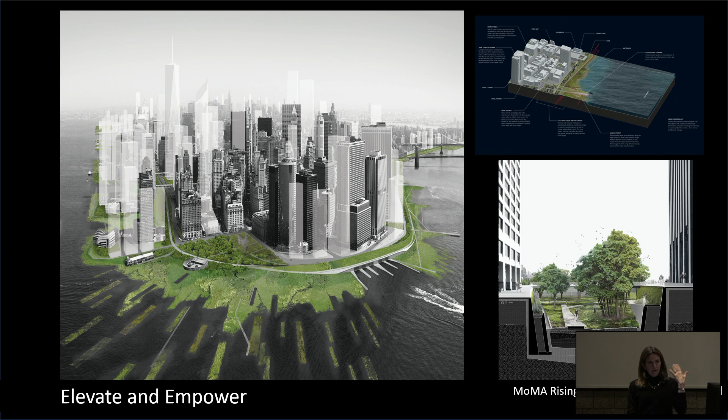So at the neighborhood scale, with the goal of making more resilient environments, we empower communities, in this case the Gowanus community of Brooklyn, with replicable strategies that could be deployed to reduce the pestilence of combined sewer overflows, control flooding and add needed open space. So the urgency of the community's voice was elevated to bring policy change, and some of the physical barriers were lowered to facilitate increased permeability.

So there's sort of two really emblematic projects for me that I like to start out with: the Sponge Park, and there'll be a book coming out about this over the summer, and then Rising Currents, which was about protecting, you know, a major metropolis.

But in terms of my work in general, I like to think of going from innovation to implementation, and when I started my practice, a lot of the work related to the adaptation of infrastructure systems. I was really entranced by post-industrial infrastructure when I was in graduate school, and I saw the potential for an invention of new kinds of systems that manage stormwater or make new public space or reconnect communities to break down some of the boundaries that were created by these infrastructure systems.

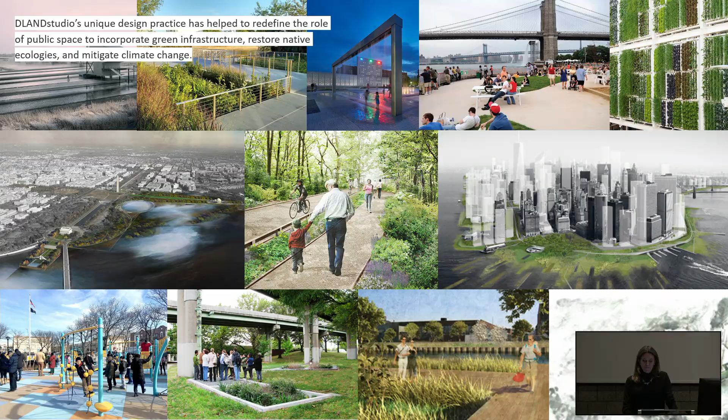So I started talking to Anna, of course, who's amazing, and I said, Anna, do you think Sasaki would want to have a New York office? And it turns out I was on a list already of firms that they were planning to talk to potentially purchase and have a New York office. So it all worked out in a really wonderful way. And we dated for a couple of years, and then we ended up merging. Because it's always good to date for a while before jumping into these things.

So Sasaki is this great platform. We have planners, we have ecologists, we have architects, we have civil engineers, we have landscape architects. One of the things I'm really excited about is we have this strategies group that develops this really cool specialized software, which is becoming increasingly useful in our practice.

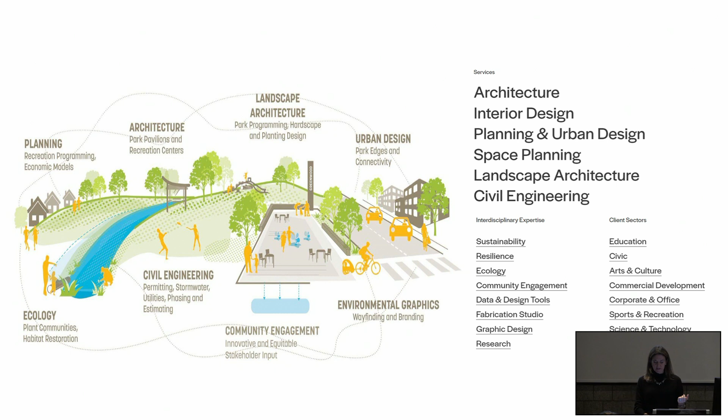Like tomorrow, I'm flying to Taliesin West because we're doing the master plan for Frank Lloyd Wright's Western Outpost. And I'm bringing my ecologist, my civil engineer, and my strategies person, and we're all going to be there figuring out the future of that really important historic campus.

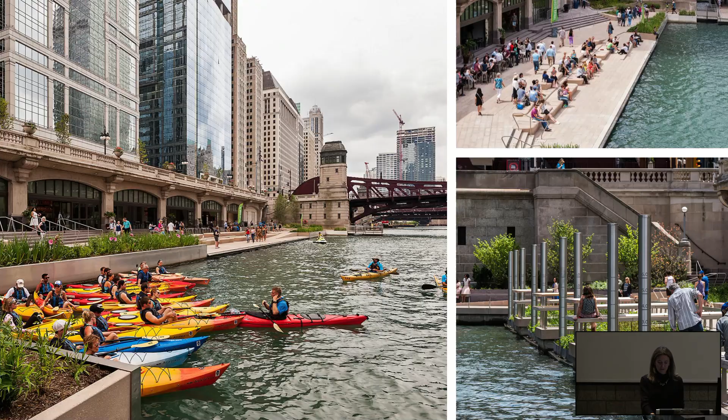And some of the things that we're doing are so exciting. Not only having the accessibility of these kayaks and bringing all the people down, but also these floating wetlands are these incredible mechanisms for cleaning the water that's coming out of a combined sewer overflow. So when I experienced this, I thought, okay, I've made the right decision. This is a great merger.

But back to the title of my talk: the Geophysical City, and you may be wondering what I mean by that. The next few slides will break it down. The Geophysical City recognizes that hydrologic and geologic systems have an imprint on urbanity that will re-emerge with climate change. And we can fight those forces of nature, but at what cost?

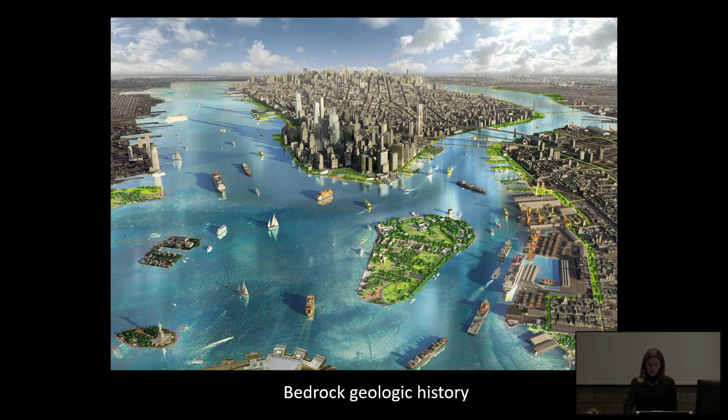Now with engineering, we fight against that a little bit more, but it was this really interesting phenomena that I think is important to consider. So in simple terms, if we look at the Earth, at the planet and its atmosphere, which created life, and its core, which made the topography, geomorphology is the shape of the land.

Earth science professor J. Taylor Perron from MIT suggests that in geology there are forces that roughen and forces that smooth. The roughening forces include movement of the tectonic plates of the lithosphere that float over a circulating mantle, and the interaction of the plates creates earthquakes and volcanic activities.

This is science that my dad worked on in the 50s. He helped to prove plate tectonics, so I grew up with this, it's embedded in my mind. My father fought in World War II, came back, got his PhD at Columbia, and they went out mapping the ocean floors. They didn't know, they hadn't proved plate tectonics yet. It seems so fundamental to our knowledge now that you have these geologic plates moving around, but it was only proven relatively recently.

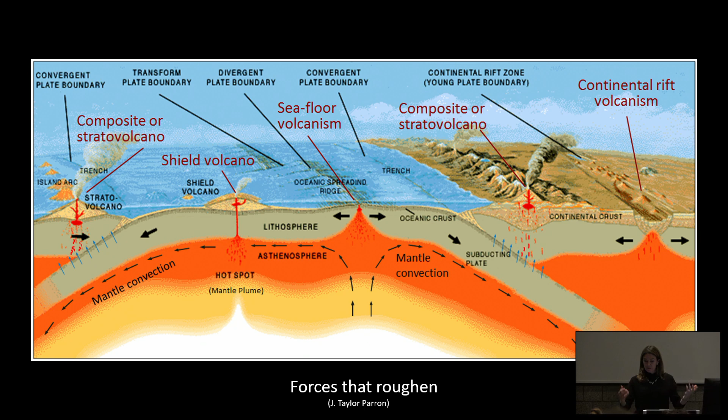What that means is that you had a huge amount of building happening without that knowledge. We can look back to Japan and say Japanese joinery is really good for building with earthquakes, but there's a lot of ignorance about building for this kind of tectonic activity, or denial. So then, the forces that smooth.

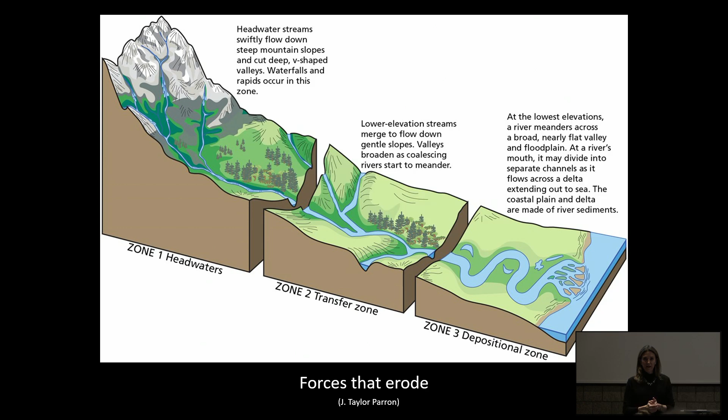Rivers and streams are among the forces that erode and smooth the landscape, and the speed of water and the material over which it passes creates different forms. I heard some wonderful discussions today about geologic activity. Clearly you're all aware of that, and it's starting to integrate your work, which is exciting, because in some places that isn't discussed as much.

Then patterns can also come from our need to come together, our need for collective activity, as we have today. And patterns can also come from policies of exclusion and segregation. So there are lots of different patterns in the landscape, some better actors than others.

Ecology is about the relationship of organisms to one another and to their environment. It's a set of relationships between complex systems and their surroundings. Ecology is not synonymous with environmentalism, which is about advocacy for the protection of natural resources.

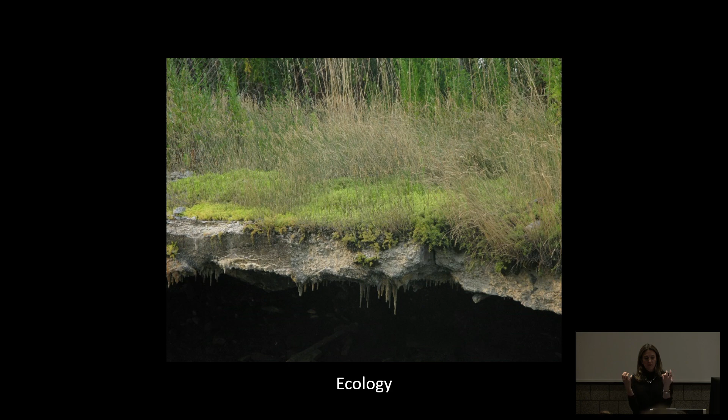A landscape left abandoned will go through iterations of succession with patterns shifting based on various microclimates. This is actually an image of the Gowanus Canal, where it's this incredibly dirty post-industrial canal, but meanwhile you have this emergent ecology coming together.

So I start to look at the connections between these things, between ecology and culture—current discourse of ecological urbanism and biomimicry, I would say, fall into this category. There's a lot of discussion about the potential for examining this intersection, and I think it's a fruitful discussion.

This is something I mentioned earlier in one of the classes, the work of ecological patterns in connection, as a connection between ecology and design. This is the work of Richard T.T. Forman, and it suggests three key steps to bring landscape design to public conscience: science, design, and a bold vision. You should all buy this book or read his writings, because he talks about the connection between the forms of different ecological systems and their ecological productivity, and it's powerful.

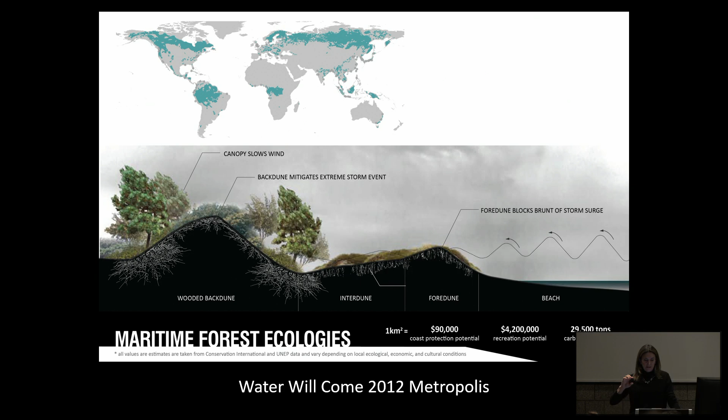It's a really powerful thing for us to understand that, say, patches of a landscape or of a landscape type aren't as valuable as a connected landscape. It's a really simple idea, but it's something that really empowers us as designers. And that can then start to connect into these huge larger scale thinking or projects dealing with the larger patterns of ecological systems across our planet.

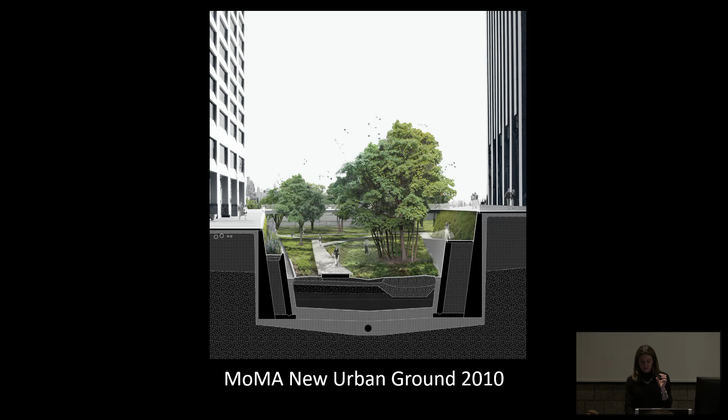So this was the MoMA Rising Currents project, and it was really looking at the combination of ecology and engineering and urbanity, and trying to realize some of these ideas. And then we have earth and culture. And again, this is Rising Currents, so examining these connections of things. And then looking at historical indigenous patterns to sort of consider how they related to the landscape, and now how we can push some of those ideas forward.

So the landscapes record the planet's past and offer clues about its future. So our research in geomorphology, the scientific study of landscapes, deciphers these records to discover how geology, climate, and life intertwine to shape the surface of the Earth and other planets and moons. We use fieldwork, mathematical and computational modeling, remote sensing, spacecraft data, and laboratory experiments. Most of our work falls into 3 areas: landscape evolution, planetary surfaces, and human landscape.

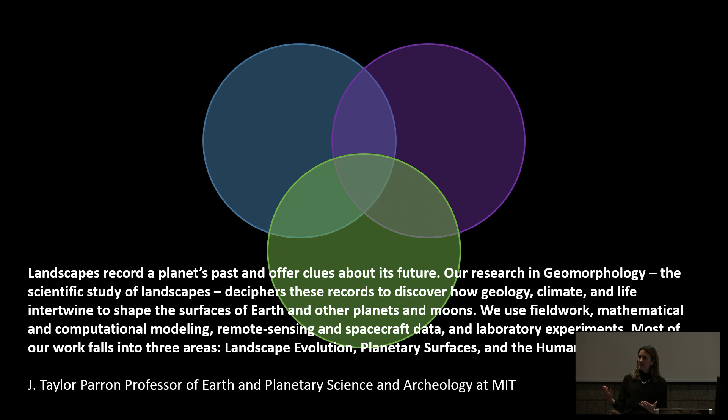This is a quote, this is not my writing, this is a quote from J. Taylor Perron, who is a scientist at MIT. And what I find fascinating is this could be written by a designer. This is thinking about spatial concepts, and that's why I think it's kind of fundamental. But

So the research is using planning and design to analyze and interpret the systems embedded in earth science, ecology, and anthropology; it explores typological and geographical case studies. And I'd say my project is to invent and explore theoretical expressions at the intersection of these things. So what I'll talk about now gets away from the abstract into more real case studies. So this is an important quote.

In theory, there's no difference between theory and practice, but in practice, there is. So the reality of transitioning from theoretical ideas to practical application is not always straightforward. And I learned the hard way through our Gowanus Canal Sponge Park project. So after complaining about a particularly challenging meeting at the Department of Environmental Protection, Kevin Clark, who was one of the project engineers at the New York City Department of Environmental Protection, said to me, in theory, there's no difference between theory and practice, but in practice, there is.

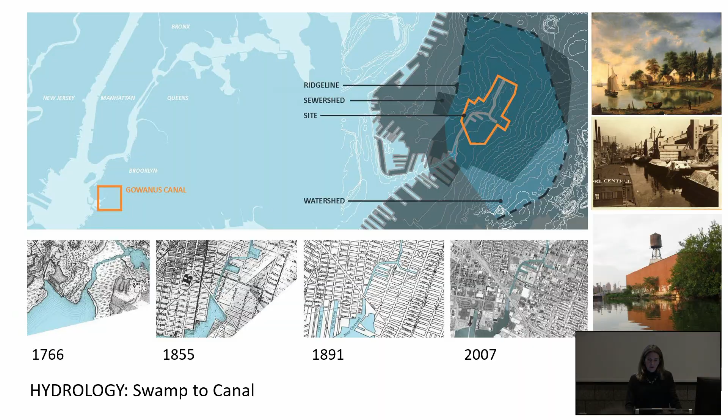It had undergone this incredible transformation from a wetland to an industrial area to a post-industrial area. And it's this low area in Brooklyn that's bordered by Brooklyn Heights, Cobble Hill, and Prospect Park. It's actually this incredibly beautiful, or was this incredibly beautiful post-industrial landscape, but it was really dirty.

So I gotta do a little shout out to Spencer Whitemore, who is a Ball State grad, who did these drawings for me because I needed these graphics for my book.

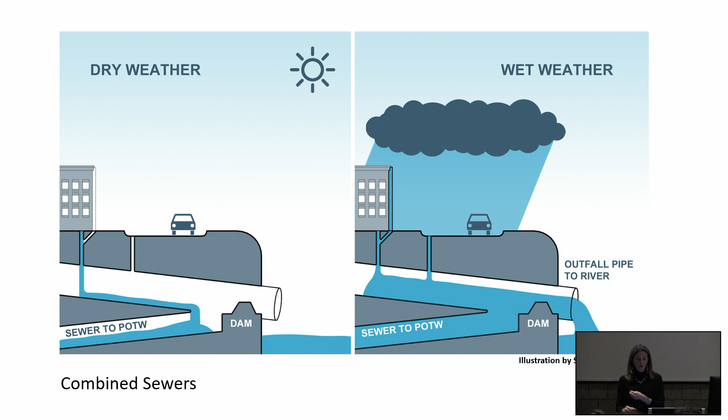Right. So anyway, this is the diagram of a combined sewer overflow. And back when I was doing this work back in 2008, this was a relatively untalked about concept that when you have sanitary sewage and rain combining in these combined sewer systems, the overflow goes into our waterways. And so the concept behind the sponge park was that you redirect the water that's falling on the surface of the ground and you channel that into these street end sponge parks.

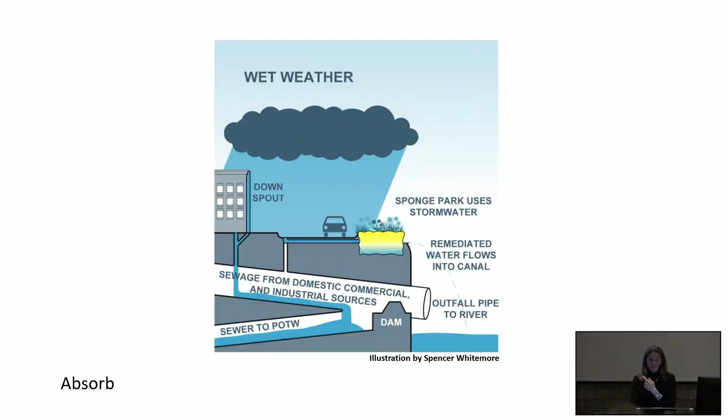And so he created this graphic too. I like how it looks like SpongeBob. It was particularly cute. But the issue here is that in Gowanus, it's an EPA Superfund site. It's really dirty, and you have all this water that's coming over dirty ground. It's collecting all the oil, it's collecting all the schmutz, all the garbage, and it's bringing it down to the street ends, and the water has nowhere to go.

And the other issue is that it's also going into the combined sewer areas, combined sewer outfalls in the upland areas. And if you look at the surface of the water there, that's actually poo. On the top of the water in the middle of New York City in the Gowanus. It's disgusting. And it's dangerous.

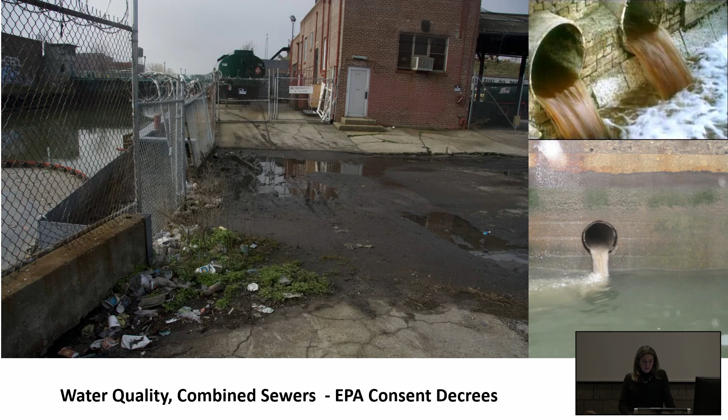And the reason that's important for me is that he also created the EPA, and the EPA has these consent decrees against cities that have combined sewer overflow systems to clean up their waters, right? So that all is putting pressure on New York City to clean up the Gowanus, and so that enabled my project.

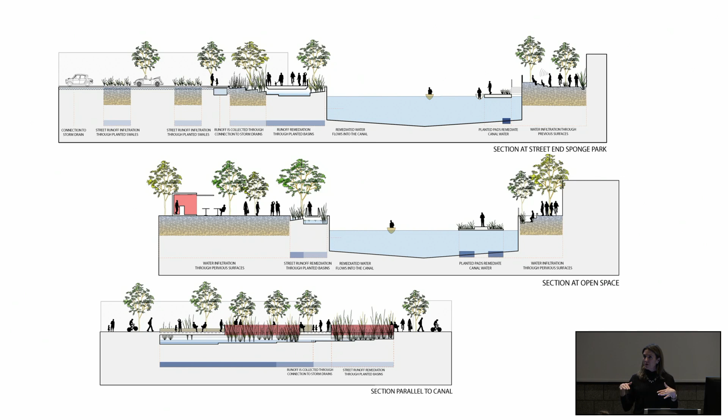So I'm dealing with a global issue, combined sewer overflows. It's not just in the United States, it's all over the world. And thinking about it through a local pilot project. The pilot started with a master plan and then moved into a smaller pilot project. So the idea behind the Gowanus Sponge Park was to make more absorbent landscapes in the area that surrounded the canal. It used to be a swamp, as you saw in one of those early images, but it's all been hardened, it's all paved, and so there's nowhere for the water to go.

So what we were trying to do is actually restore that historic hydrology and also make a public space, and also use plants that could start to phytoremediate some of the toxins in the soil and in the dirty water. So we want to use the power of these landscape systems to actually clean up the canal. And while we're doing that, also make a new cultural redevelopment area, because there are a lot of really cool old buildings in the Gowanus that could be repurposed.

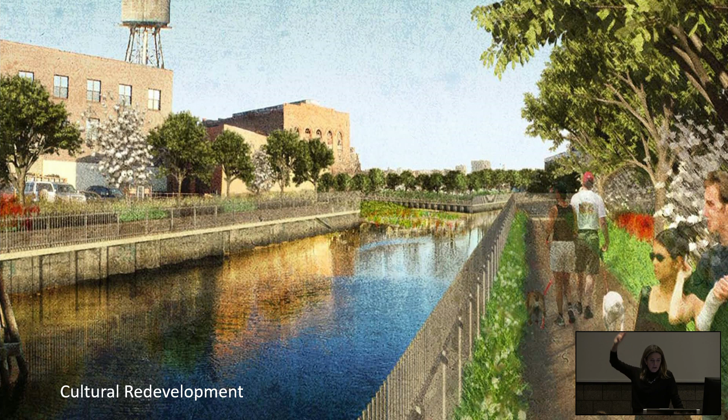And that was what we planned back in 2008. That really cool building off in the distance beyond the water tower has been turned into an art center now. So a lot of the things that happened within this master plan have come to fruition. So we worked with a really wonderful team to do this project, a team of engineers and soil scientists and people from Manhattan College who were doing monitoring.

So this is one of the most important drawings that I have ever created, and the reason it's important is that it outlines the jurisdictions that exist in the Gowanus, and it explains who owns what and who controls what part of that landscape. So, for instance, the soil underneath the canal is controlled by the EPA Superfund people. That's one entity. It's a navigable waterway, so the water is controlled by the Army Corps of Engineers. There was some question about the bulkheads being a historic element, which would have brought in the state preservation group called SHPO.

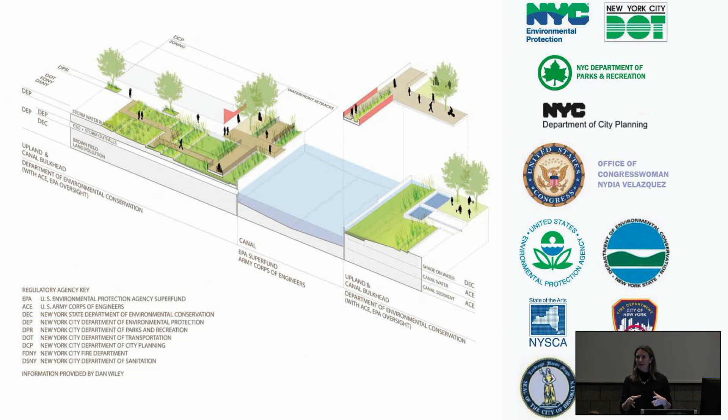so there are about 200 permits you have to get for any waterfront project, and that's not even in an EPA Superfund area. So it was really complicated, and the pilot is like this big. It's this tiny little project, but it was important because it was trying to move the needle on adding these permeable spaces, these green engineered spaces in New York City.

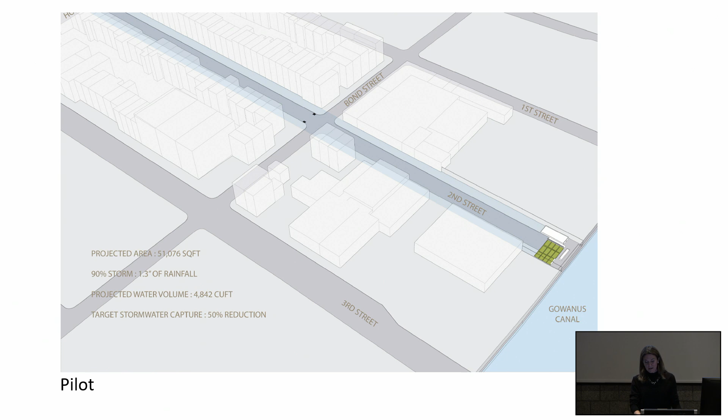So this is just an image of the catchment area showing that we had a projected area. All you landscape architects know that you can calculate the amount of water in that catchment area and then design your green infrastructure system to manage that water. And we chose the street that we chose because it had the largest catchment area.

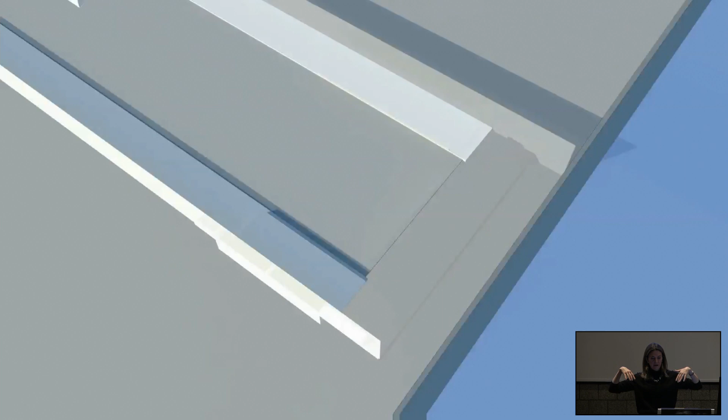So this is a little animation that shows how it works. Hopefully this will work. Yeah, there we go. So this is the existing condition. We took these out because they had curbs around them, so they'd only catch the rain that fell from the sky. And then we put in these new bioswales. There actually is a notch in that one, so it'll let the water in. And then I designed it using a series of what I called these bioretention cells.

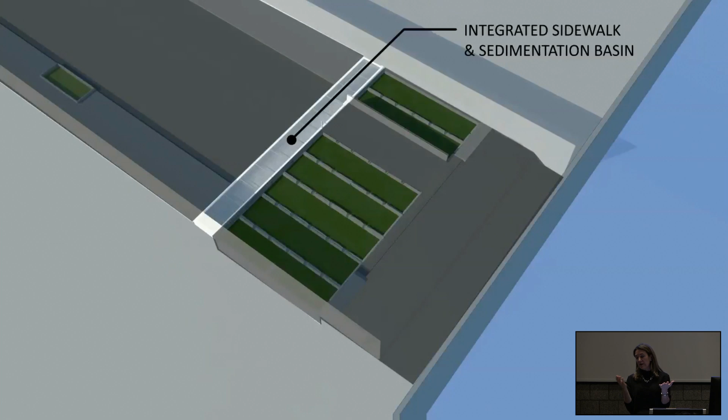I used precast concrete because in New York City we have a low bid contracting rule in the Parks Department, actually in a lot of city agencies. And so I needed to control construction quality. And so I thought if I have precast, I can control it. And I'd been screwed on another project where I didn't, so I knew to actually insist on that.

So there's a whole pre-treatment zone. You can see the water is coming down the street, and then it goes into this pre-treatment zone where it all collects, and that gets all the little fine silt out and has a screen over it so it collects all the other big garbage. And then it goes into the cells, and then the plants will use it, the soils will absorb it, the microorganisms will be happy in the soil.

And then if there's a lot of rain, more than the 1.3-inch storm we designed for, then the excess will go into a sand filter and then go into an existing drain and into the canal. And the idea is that this will become this new open space for the Gowanus, and that it'll provide more public access, and that we'll get birds and butterflies.

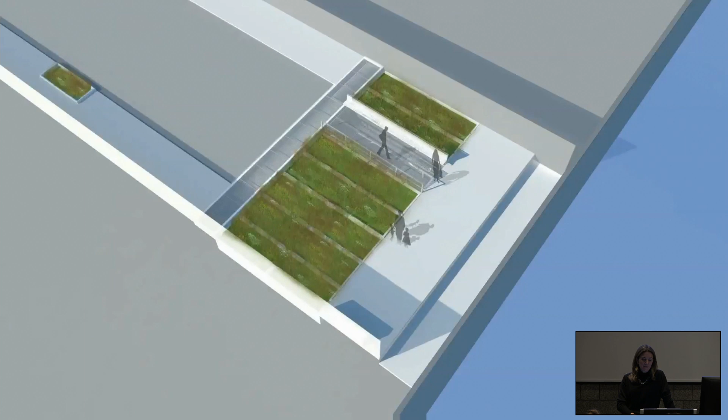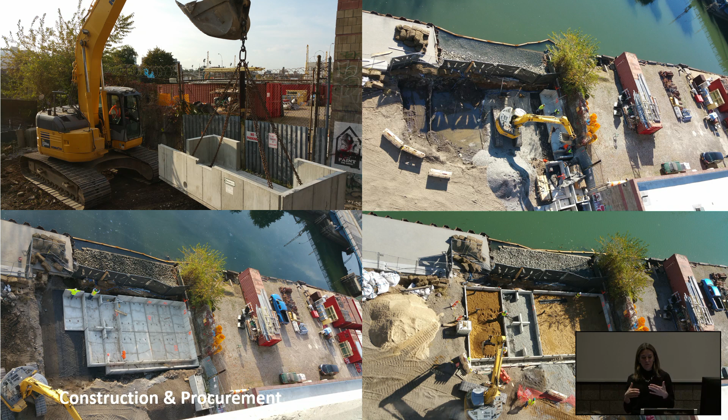And what has been exciting is that it's been in for 4 years, and actually more than that, it's been in for 7 years. And it's the place in Gowanus where we have the only native bees. So it's kind of cool. So this is just it in construction. It's kind of unheard of to do this kind of thing with precast concrete. But anyway, we did it, and this was it when it was built.

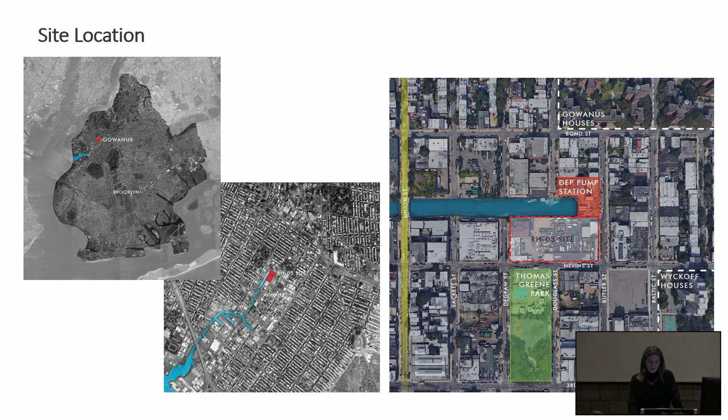And then I've since done some other projects in Gowanus. One is this giant tank facility that's actually managing a lot of the combined sewer waters before they go into the canal. The city determined that they couldn't absorb all the extra runoff with green infrastructure, so they were forced to build this big tank facility. And so we worked with the city to create this new open space framework on top of one of the tanks in Gowanus. So it's this new public park that sort of connects in different ways.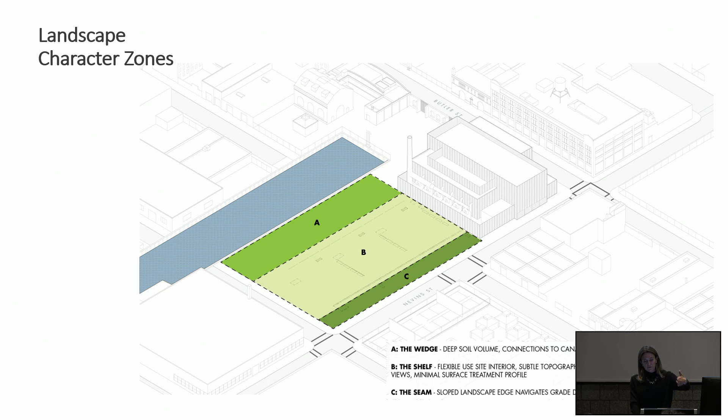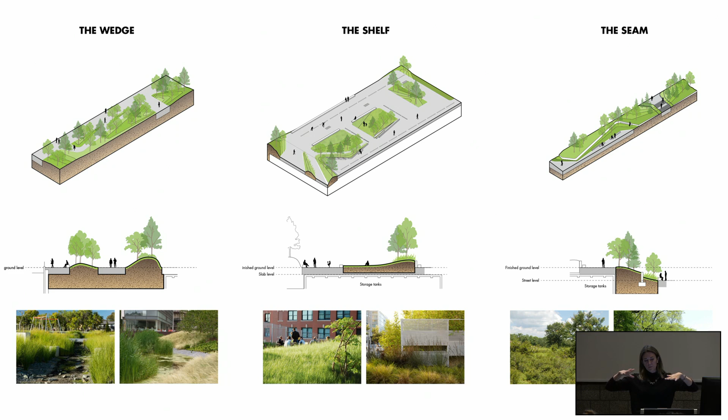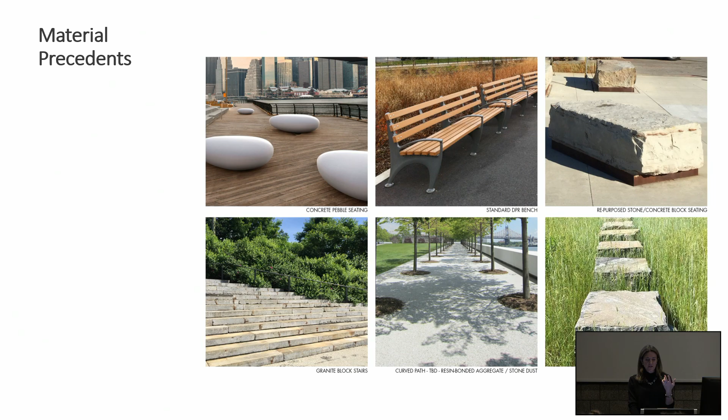We have these 3 zones, one called the wedge, one called the shelf, and one called the seam. And each addresses a different set of relationships: the wedge connecting to the canal, the shelf is a larger, more open public space, and the seam connecting back to the city. We used a lot of industrial materials that existed on the site and then reinterpreted them in how they were expressed. We had to use a lot of standard elements from the Parks Department, and also use plants that really required low to zero maintenance.

We also had to consider the mobility of a bunch of trucks that were going to be running through this space, so we couldn't just make it a big green space. We had to think about how the trucks could access a series of pump-out stations. So this is it. And the building behind it, the screening was designed by Annabelle Selldorf's office, and they were really wonderful to work with, really talented architects.

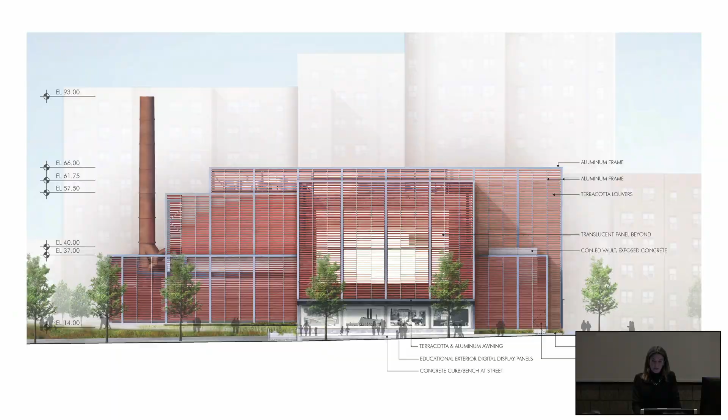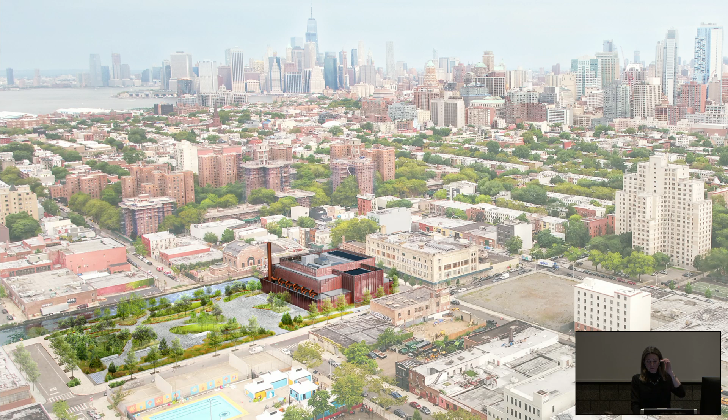And this is just the seam showing the connection back to the city, and then this open space up on the top, and then the wedge connecting to the canal. So anyway, we've been working in Gowanus in different ways over the years, and then in 2021 there was this rezoning, and basically the whole place just got torn down. All the industrial buildings got torn down, and there are these giant buildings going in, and they're planning 8,500 new housing units, which I just think is not the wisest thing to be doing.

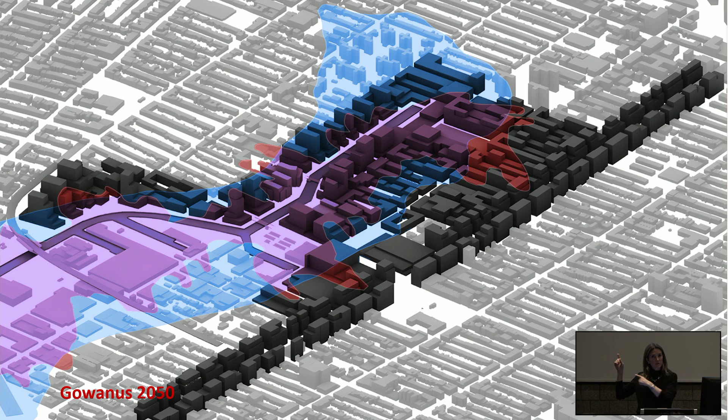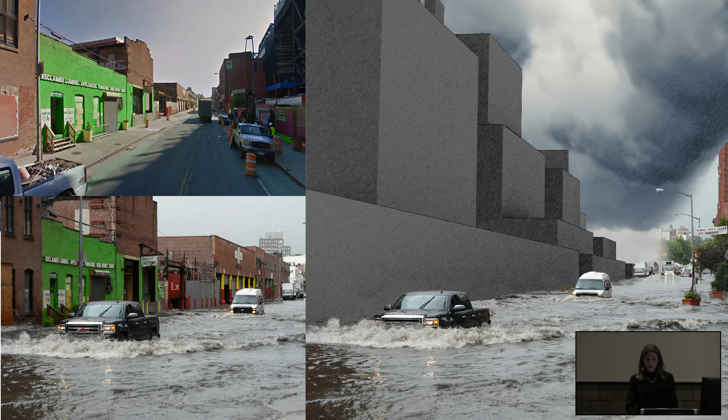I could say it in a less delicate way, but because this is the floodplain, this is what we anticipate, and there's a suggestion that the ground is going to be elevated, and some of the buildings are elevated, but those big towers that you saw just a minute ago, they're not elevated. And so they're just saying, oh yeah, we're going to have flood barrier doors that are going to close if there's a flood. But this image, that's not Photoshop. That was a few weeks ago.

So that's Gowanus, and it's already getting so much flooding, and this is the projection of what they're going to be building in this area that's already flooding. And so I just think it's kind of crazy. So that'll be a chapter in the book, and I'll probably never work in New York again after that comes out. But we'll see. Because there are options.

After the Rising Currents project, I worked a lot with adaptation in place, but in 2016, actually it was probably 2015, I won a competition in collaboration with Rafi Segal, who's a professor at MIT, to do a project that we loosely titled Coastal Urbanism, but it was looking at the New York City waterfront and proposing a plan for how to adapt the whole waterfront.

So the Regional Plan Association has done a series of plans of New York. It was a group of business people who came together and said, hey, we've got all these agencies, and we've got New York, we've got New Jersey, we've got Connecticut, we've got this metropolitan area that doesn't have a common planning metric or organization. So the RPA became an organization that would bring together the different regional actors for a collective vision.

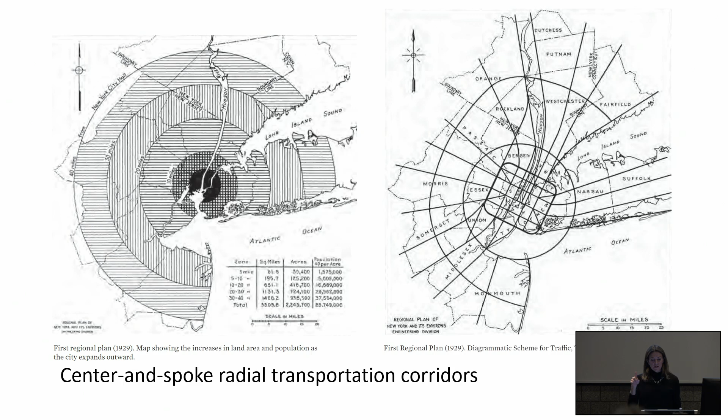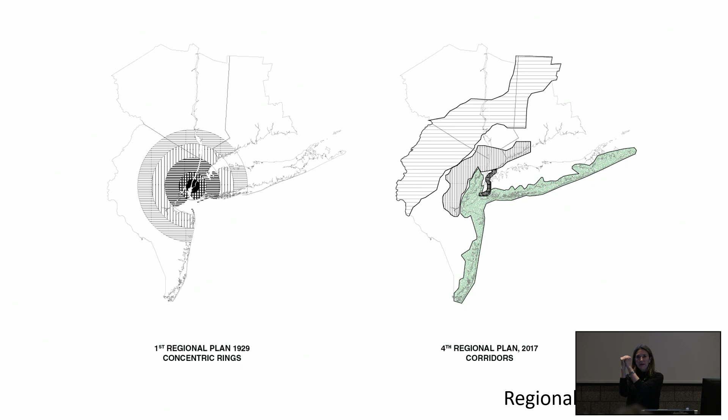So some of the original ideas had to do with this kind of spoke and radial system, but what was interesting about the fourth regional plan was that it looked at corridors. So it's much more of an ecological approach. So instead of saying, okay, here's Manhattan, here's the money, and then here's the way everybody gets there, this one had to do with this region of the highlands, and then, actually, let me look at the next slide. There was the highlands, there was the suburban belt that they called the inner ring.

There was this thing called the Triborough, which was actually a transportation area, and then there was the Bight, and I was looking at the Bight. And the Bight is a term for a sailor's knot, for those of you who aren't familiar with it. But the idea was that there was a much greater recognition of ecologies and watersheds within this plan. So Rafi and I came up with this overall mantra of moving from a water line to a zone.

So thinking about how there's almost like a crumple zone that needs to happen along the water's edge, and it's actually a feature that used to exist in our landscapes. When you look at the barrier islands all along Long Island and New Jersey, those barrier islands used to shift and move, and they were not static, but we've hardened them.

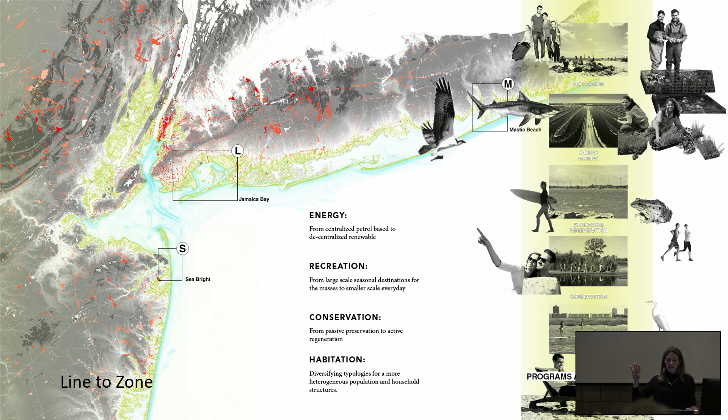And because we've hardened them and because we have buildings on them, we now have more damage that's happening to those hardened landscapes, and those landscapes can no longer provide the protective function that they used to for the upland areas. So within this, we were looking at energy, recreation, conservation, and habitation, and then we came up with some concepts for how we would sort of organize a new city around those ideas.

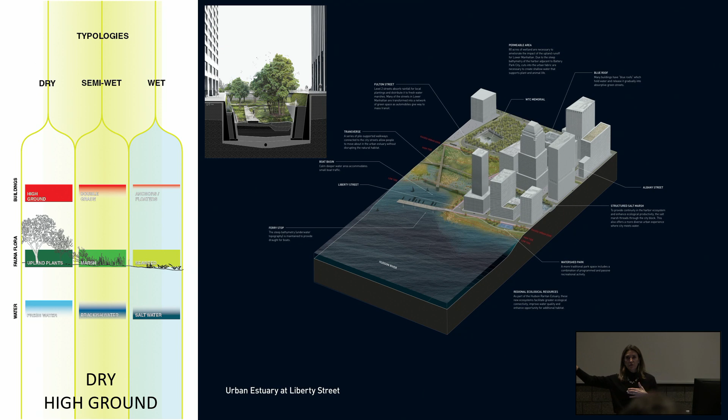So we had areas that were wet, so those were areas that would always flood. You can see there aren't a lot of people in these zones. They were places that were much more about an ecological approach. Then we had these semi-wet areas, and those were areas that might have more landscape programs that involved people, but probably not a lot of buildings. And then we had the upper area, so the dry, high ground areas. And what we were projecting was that those high ground areas would be the future waterfront. So we're looking at where the waterfront is going to be in 100 years.

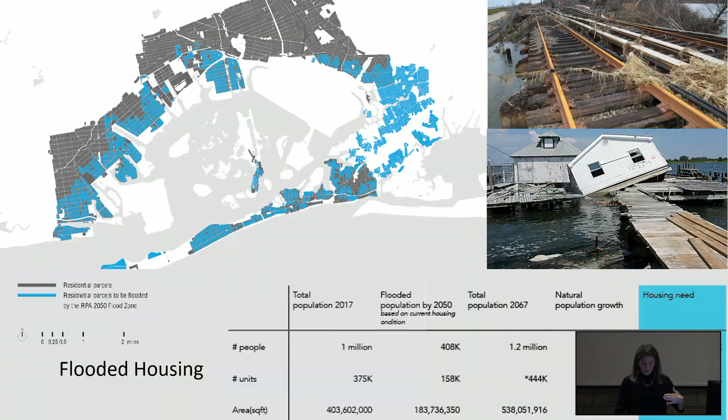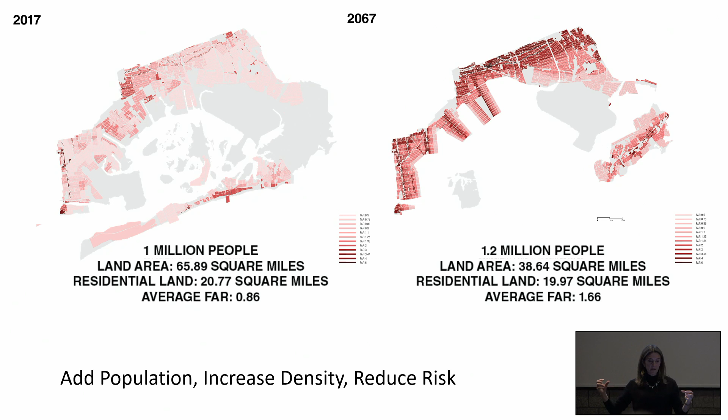But our proposal is to have that whole population migrate back to that higher ground and make a linear city along that transportation corridor. So the days of Manhattan being the be-all and end-all of New York City are kind of over. I mean, it's still awesome, but there are many more kind of tentacles of urban density coming out from Manhattan. There's a lot in Brooklyn. There's a lot in Queens. So our thought was this could be this new kind of extended area of density leading out basically toward Kennedy Airport.

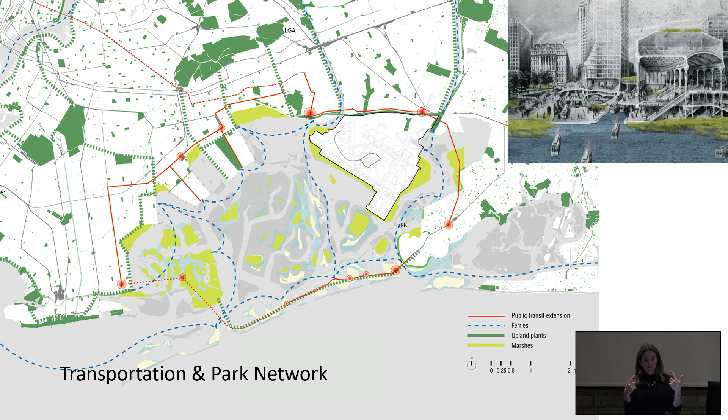And one of the concepts here, and I do a lot of work with these kind of cute diagrams, was that maybe you can take some of that upzoning area and use that as a fund to buy people out of the coastal areas, and hopefully use it to maintain the coastal areas, because one of the big hurdles in green infrastructure is maintenance. And we learned that again firsthand on the Gowanus Sponge Park. So those last slides I showed were all about development, and this one's about creating a new transportation and park network, with boats and parks all integrated into this new city to have this new water life.

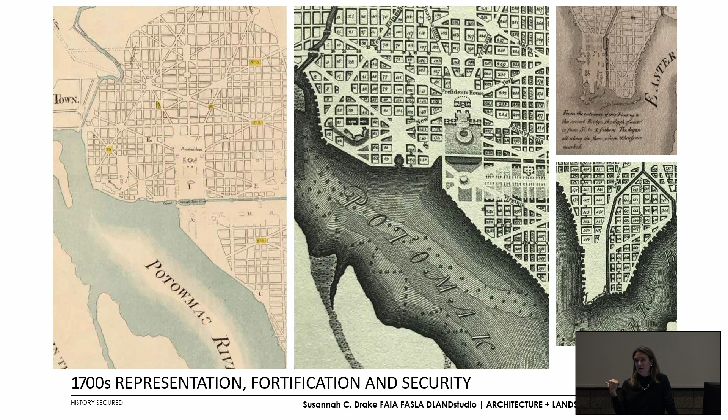And these two images here, I think, show that particularly well, and part of that happened because L'Enfant, I don't know, he was kind of dragging his feet and he wasn't getting the plan done. And so ultimately the powers that be got frustrated, and they ended up sending his drawing to a printer in Philadelphia, and then they created the plan. So there's a lot of stuff that got drawn in the official plan that really wasn't part of his vision.

So part of what we were trying to reflect in the design was also this power and the symbolism of nature reflected in the Hudson River School paintings, and then also the revitalization of classical monuments and infrastructure in the 1900s that came out of the World's Columbian Exposition and also came out of an AIA convention. Put my AIA hat on, that happened in Washington.

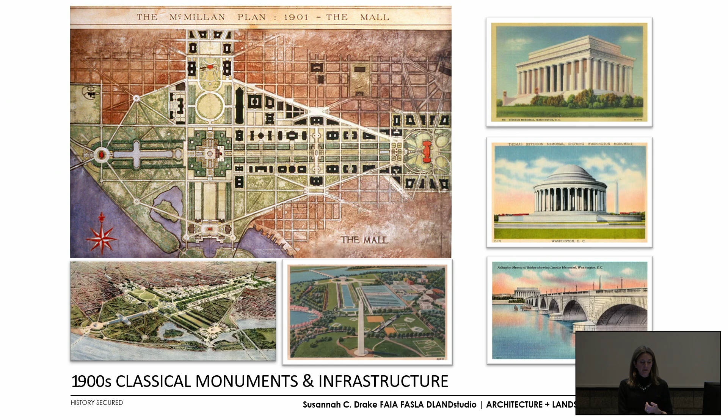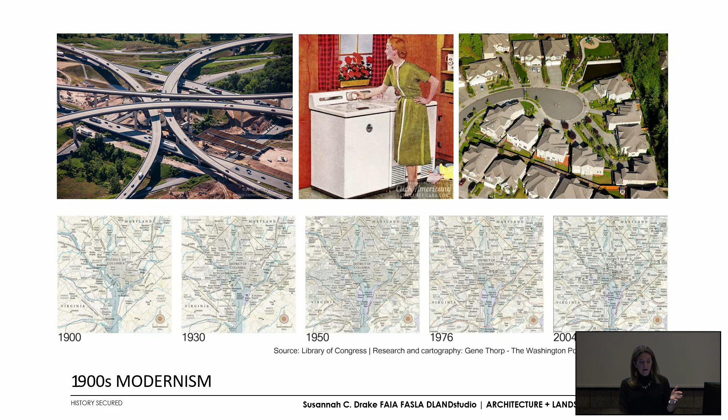So a lot of these monuments happened because of this kind of renewed idea about classicism, and I'm obviously giving this a very short description, but then there's also concepts of the WPA that we built into this idea or into our planning, and then also importantly looking at modernism and how from 1900 to 2004, 12% of the Potomac watershed got paved.

So in Washington, D.C., we have this little issue. The reason we were brought in to work on this project, this was a laboratory. They brought in 5 design teams to work on this. And they brought us in because the tidal basin area is flooding, and those beautiful cherry trees that exist around or near the mall are dying because they're flooding. But if you pave your watershed, of course this is going to happen, right? Especially when you're building in a floodplain and in a former swamp.

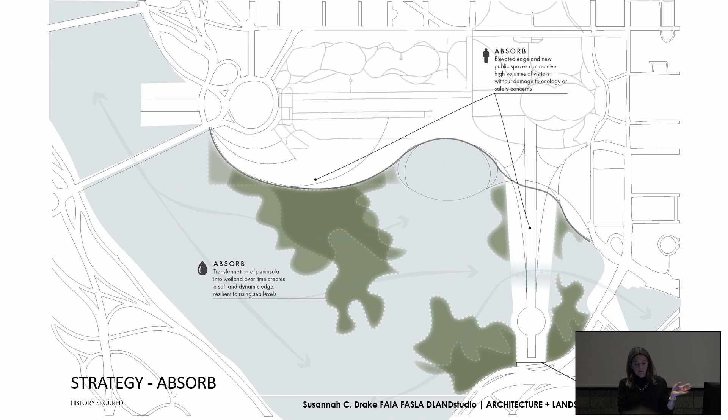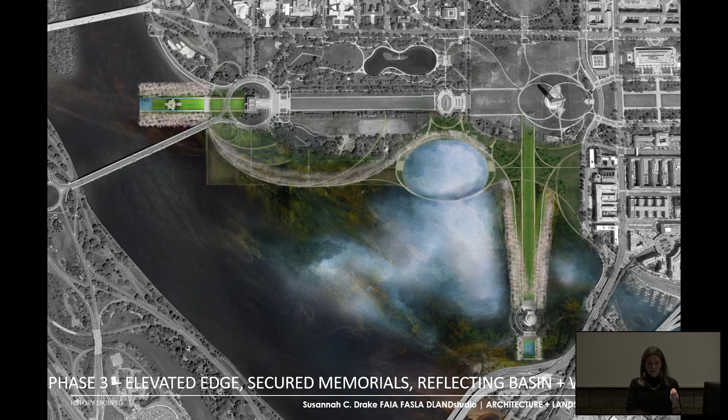So this projection, this is the 2019 projected flood zone. That's just 2019. That's not even the future. So we really can't ignore this problem. So we kind of said, okay, if that area is going to flood, let's let it flood, and let's create new kinds of barriers or areas to absorb the water, and then also to reconnect the mall to this area. We used a lot of the pilots and prototypes that we developed on other projects and thought about how those could be deployed in different ways throughout the area.

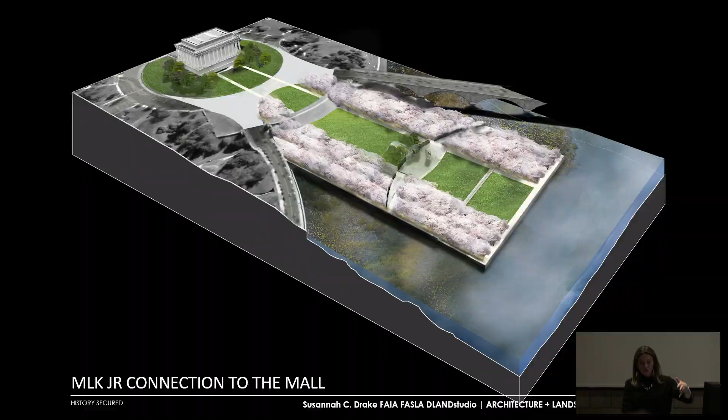We moved the Martin Luther King Memorial to this former public space outbound of the Lincoln Memorial onto this little jetty. The jetty would create a flow and a sedimentation that would help to create the wetland. We created a connection, a land bridge from the Washington Monument out to the Jefferson Memorial. So we're connecting a lot of things, even though it seems like we're dividing a lot of things.

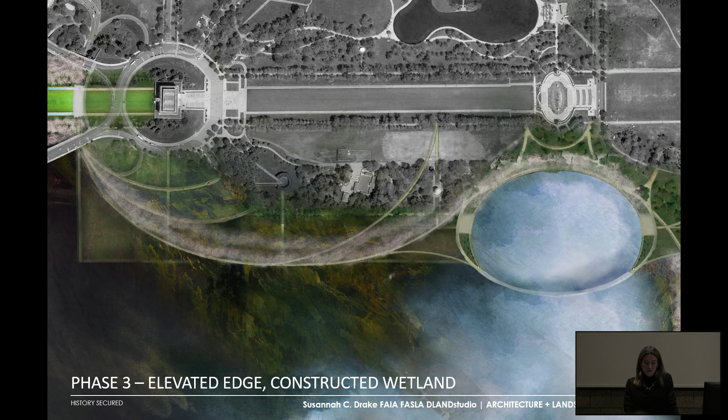Creating a new public space on the road side of the Jefferson Memorial as a new kind of public landscape that's also a protective barrier so that someone can't drive off the highway and into one of the memorials. And then looking at a new area to plant the cherries, and also a renewal of these swimmable waters. So relocating the FDR Memorial closer to the mall, closer to the World War II Memorial, and ultimately burying a lot of the traffic in order to facilitate safer pedestrian connection all across that landscape.

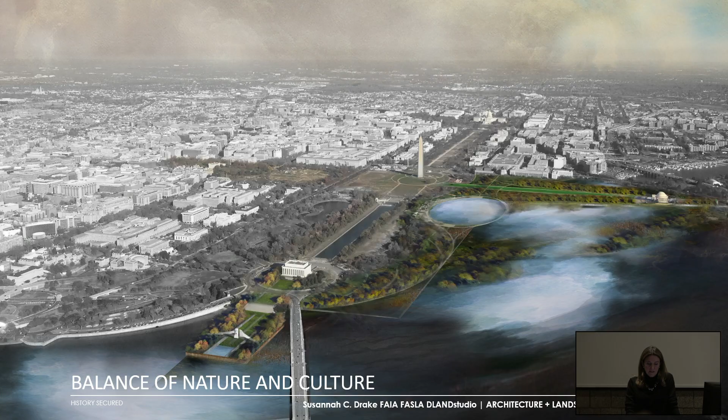So it's creating this very different view of Washington, D.C., but something that is potentially a lot more sustainable, a lot safer, and protective of a lot of the resources that exist upland, because we do have these elevated areas that will protect the Smithsonian and the African American Museum and the FBI. So it's a big, bold vision, and we'll see where that goes.

So I do want to do one more, if we can. You guys mind? It's just okay.

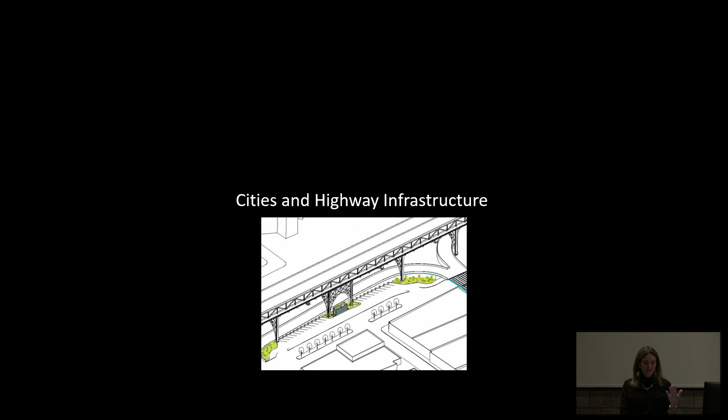Because this is cool. Because this one ties it back to the infrastructure. So cities, and I've done a lot of work with cities and highway infrastructure, and the term infrastructure, who knew? It developed in the World War II era in reference to military logistical operations. And General Dwight D. Eisenhower, all about national defense, the highway system is purported to be about national defense, but it was obviously also about real estate development and creating markets. And there are also many layers of racial overlays that can tie into that I don't have time to go into today.

But beyond the building of these highways, I'm grateful for Lady Bird Johnson, who helped to advocate for the Highway Beautification Act, which was put in place the year I was born, because it did help to improve the design of some of these highway systems. But unfortunately, they're designed for engineering, for moving cars, and not designed for moving through cities. And we feel those impacts regularly. They've also been used as tools of racial segregation.

So I have a project, an animation that I'm going to show next that is not in the US, but it's kind of close enough. It started in Montreal, but it was a competition again, and let's see if we can make it go. Here we go. This one has sound. So we were asked to create a better connection from the airport to downtown Montreal, and we decided to look at all of North America. Because, you know, why not?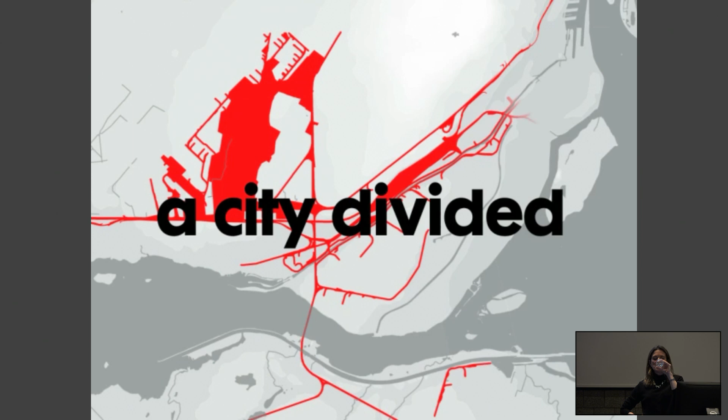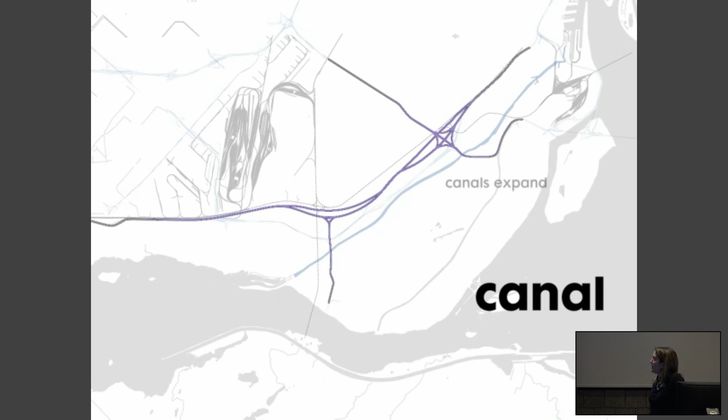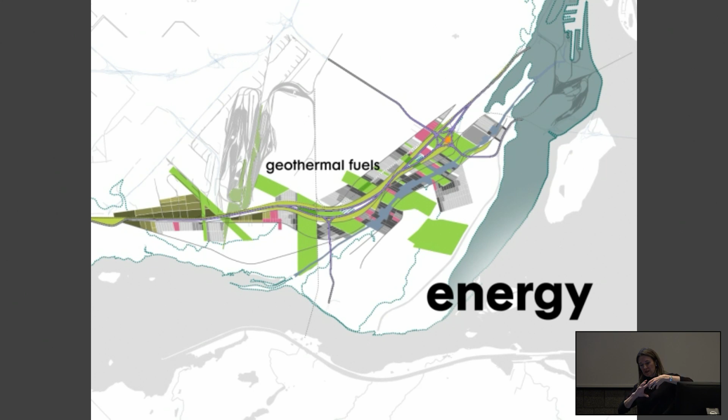So this was just a big idea about how to reconnect cities with infrastructure, how to adapt those infrastructure systems. And it really grew out of work that I did when I first started my practice, on a project I called Reconnection Strategies for the Brooklyn-Queens Expressway, which examined the site where Robert Moses had basically plowed a highway through a neighborhood. And this is around the corner from my office. And I felt that this was something that could be fixed.

It was around the time when Brooklyn Bridge Park was being built, and this neighborhood was getting nothing, and Brooklyn Heights was getting a beautiful park, and I thought, well, that's not fair. And so I thought, I can do something about this. I can come up with this vision, at least, for a better future. So I applied for a grant.

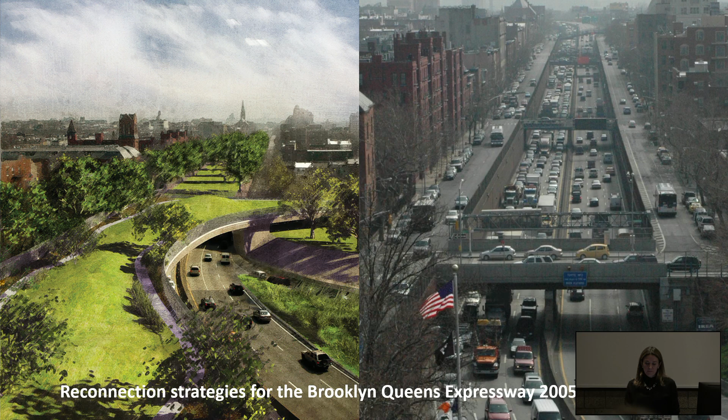I've done a lot of work with grants. So students, it's important to know how to write. So don't ignore your writing. Because you can get money if you write a good grant. Like, people will give you money to just do your own projects. It's pretty cool.

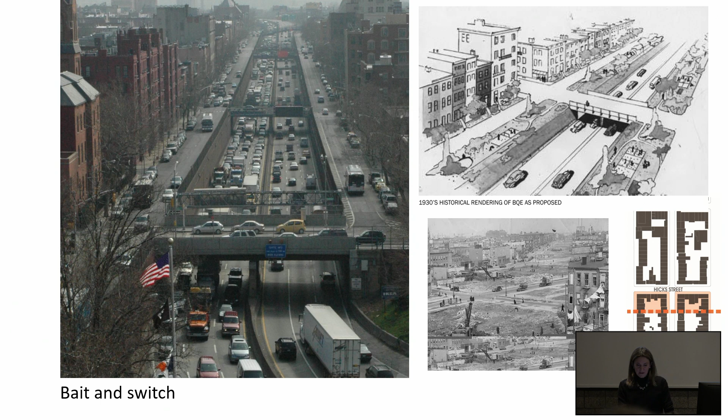So this landscape by Moses, you know, he promoted the idea that he was creating these parkways, and he did create a lot of playgrounds around the city, but also created these really awful highways that ran through the city. And you can see here what I was talking about, how they plowed through that brownstone neighborhood and sort of interrupted the donut of the buildings with this plan of a parkway that you can see is not really a beautiful parkway. And these highways bring with them a lot of problems with public health, disconnecting people, bringing particulate matter into neighborhoods, and creating territories for gang violence and exacerbating poverty.

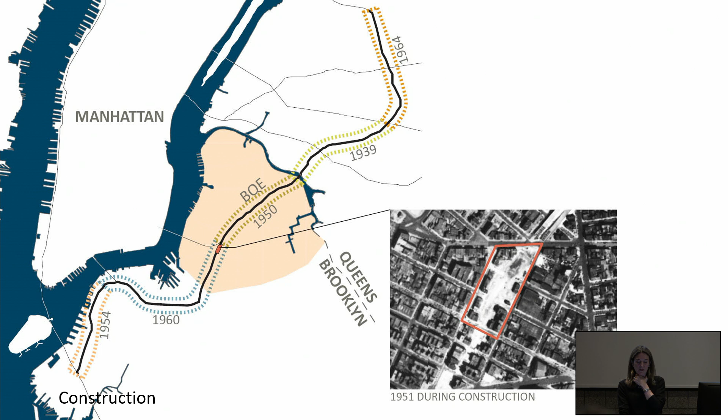So we did some analysis. We always do a lot of research when we do our projects, and we found that this particular section, so I was showing you one section that I looked at, and then I did a more real project here, was built in 1950. So we recognized that was pretty obsolescent infrastructure. It needed repair.

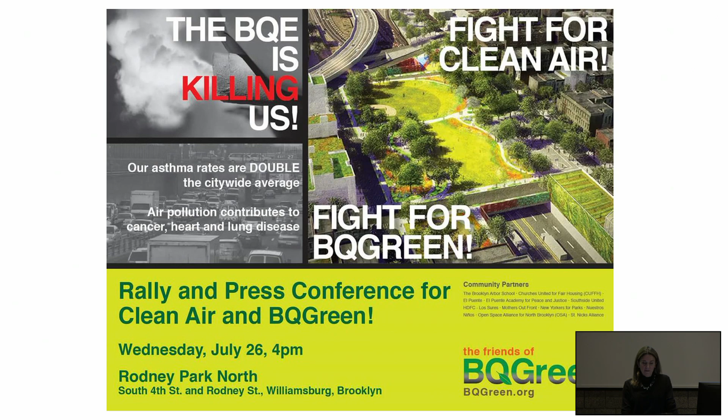We also worked very closely with the community who was fighting for environmental justice, fighting to get this a park instead of this highway. So we collaborated with them on this vision to create this new park space over the highway, between these existing bridges, and have had a series of rallies. We've been advocating for this for years to try to break down these barriers.

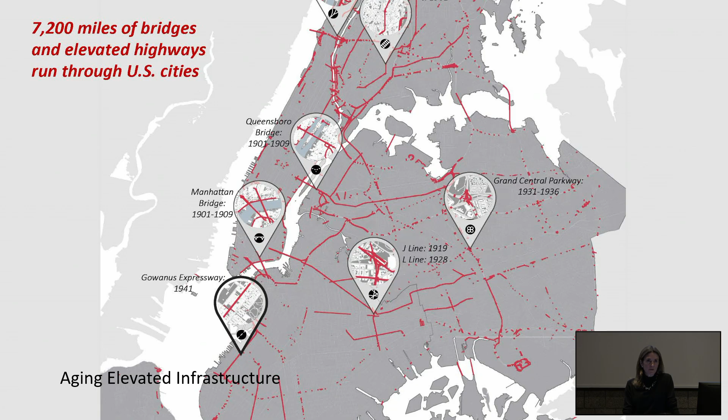And you know, these barriers exist in many parts of the city, and as I suggested, it's aging infrastructure. And what that means is that it creates an opportunity for replacement of the infrastructure, and if you're going to replace it, you can replace it as it is, or you can look at opportunities for how you might actually bridge in between and fill in between those spaces to create this new park. So if you're going to spend the $30 million or 40, whatever it costs to redo those bridges, why not extend them and make something better?

So this project was really kind of fun. So many creative people have got involved. They even made a cartoon character related to it, called La Reina Verde, and it's after Diana Reyna, who was the city council person who was really the main advocate for the project. But I'm sort of talking about a bunch of different projects here. There was the work that I did with the NYSCA grant in one part of Brooklyn. There was this project in another part of the BQE.

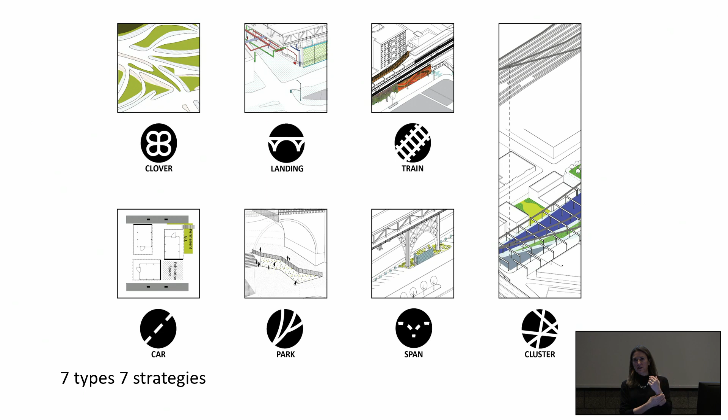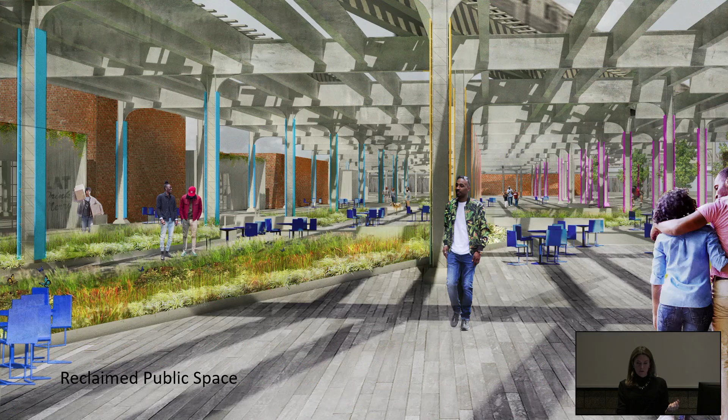And then that also led to doing work with the DOT and the Design Trust for Public Space, developing strategies for what to do under elevated structures throughout the city. So about 700 miles of elevated structures run through New York City, and this is just one example of, hey, let's take the space underneath the elevated highways, channel the water into these bioswales, or let's take a space that has this giant canopy and use it as this new public space with an art program, and try to turn it into something that's not a really scary, dark piece of infrastructure, but turn it into something that's an engaging new public space for the city.

So just to conclude, the projects that I've shared with you today reveal use of natural systems to benefit urban life, but they're also kind of about this overlap. They're the overlap of the cultural, the ecological, the geophysical. They're all kind of coming together in what I describe as the geophysical city. So thank you.